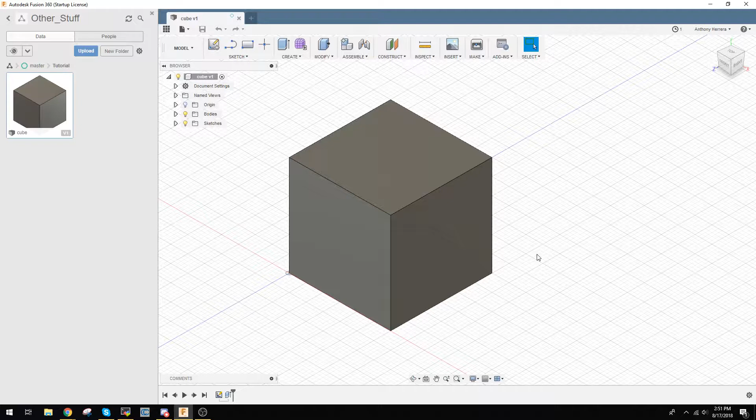I'm going to go over one of my biggest pet peeves when making a part, and that is this center point right here. I'll show you why I don't like it, and then I'll show you how I usually start out my sketches.

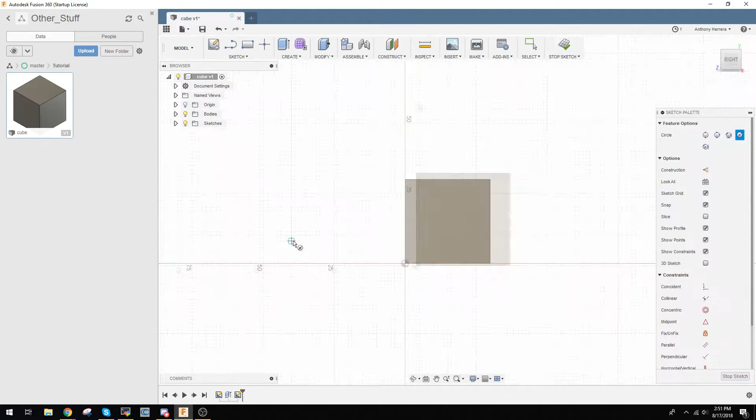Let's say I want to draw a circle on this face right here. Don't worry about how right now, just get the general idea. I want to put it right in the middle. Okay, I have the circle now, but where do I reference it from?

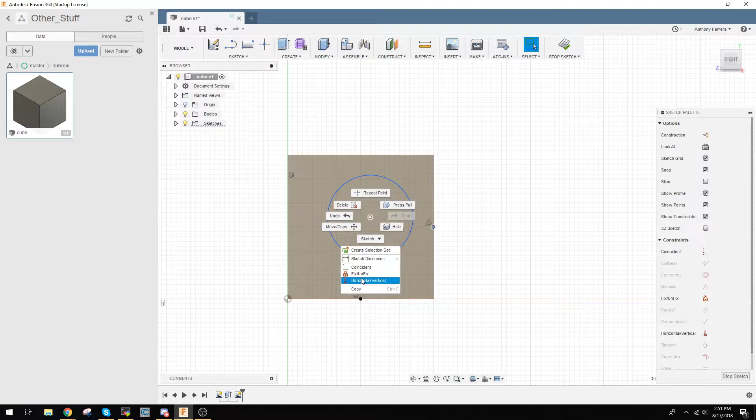I want to reference it from this point. So in order to reference it and put it right in the middle, I have to make two midpoint dots, select these two, make it horizontal, make it vertical, and then finally, after I dimension it, I can create and make a hole.

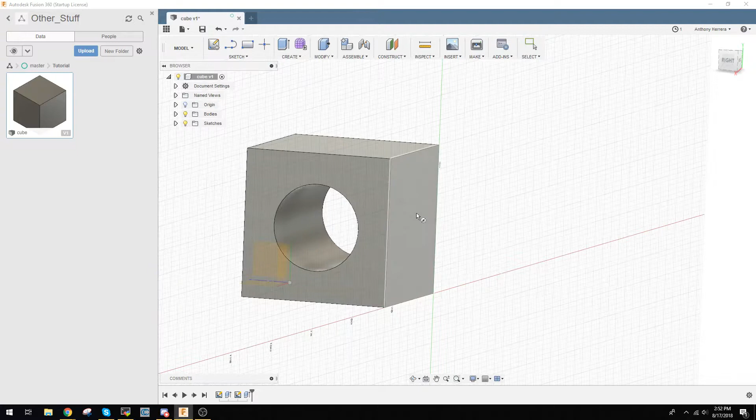Okay, well that wasn't too hard, but let's say I want to do the same thing on the other side, this face right here. Circle, go over here. Oh, well I want to make it in the middle. So now I've got to make a point, and I've got to go through the whole process again.

Alright, there, that's what we call the problem definition or something in engineering. I didn't pay attention. Okay.

So now that you see what the problem is, there's a way to fix this that I like quite a bit, and that is to go back to the original sketch and change where your base point is right here.

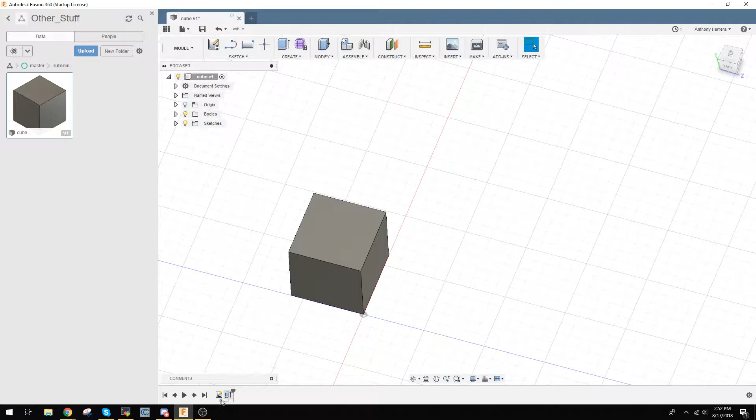So if we go back to the original sketch here, this is our 30 by 30 cube. That's great, but we're going to redo it. We'll redo it from the ground up.

So to select objects, what would that be? Left click and drag. When selecting, the direction that you drag makes a difference. If you go this way, only objects that are totally enclosed will be selected. If you go the other way, any object that the box touches will be selected.

So this way, it only selects the dot. This way, it selects both sides of the rectangle. Either way, select everything, delete everything, and we're going to start again with a new square.

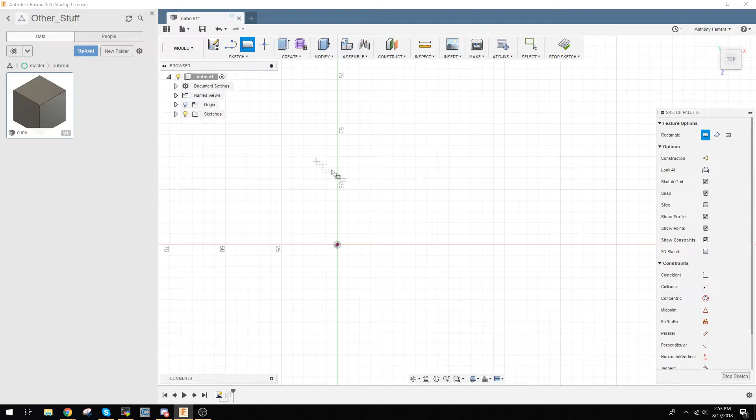If you'll notice down here, I didn't delete the extrude. That's okay, I can redo that afterwards, and I might be able to show you how to fix warning problems. So you come in here like we did last time.

You make a corner here, you make a corner here. Click, click. And we have to define it. So right now, we're moving around all over the place. So we'll define 30 by 30, just like we had before.

So escape from that, that was the D button, dimensioning to do that. Now, you see we're still blue here. Well, why is that? Well, because it doesn't know where to put it, it doesn't know where it is relative to everything else.

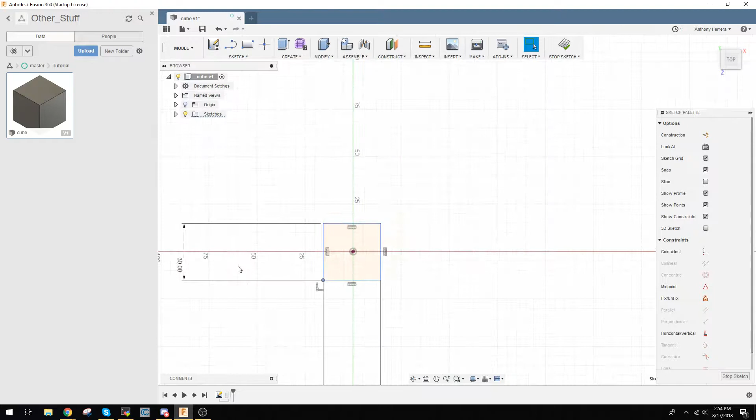So let's bring all this in a little. I use the mouse wheel to scroll in and out, I don't know if I mentioned that. It's kind of important. And we'll get rid of that, so it's just a big old square here.

So we put it roughly in the middle. Now, I have this point up here because I use it quite a bit. You probably don't. So go to Sketch, and then we'll bring it down to Point.

So we want to put the point on the midpoint of this line. So when you see that triangle, that means midpoint. I don't know why, it just does.

Alright, so I happen to be very close with that actually. But yeah, you can see those points are black, which means they're fixed, and they're fixed at the midpoint.

So now we get into a little more complicated stuff, defining relationships. This isn't too difficult, and this actually leads in pretty well to later topics.

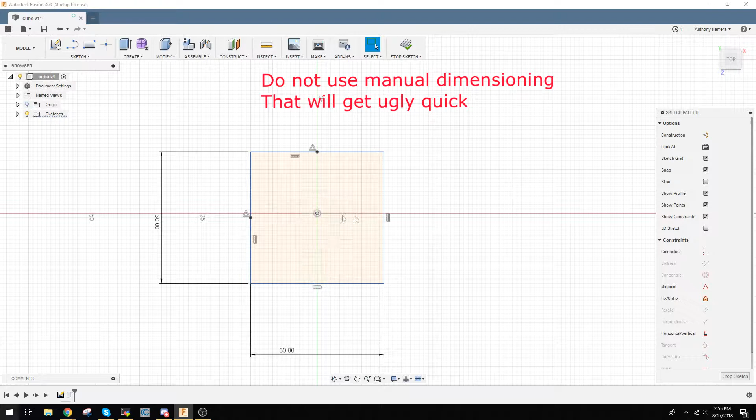But if I click this point, and then control click this other point—let's try that again, oh I pressed the Windows button. Control, click, control, click. Now if I right click, I can make those coincident, so right on top of each other, which we don't want.

I can make them fixed or unfixed. I try to avoid that like the plague, because fixing things is kind of a crude way to do stuff.

It just makes them exact relative to each other. They keep the same position relative to each other, and that can lead to problems later.

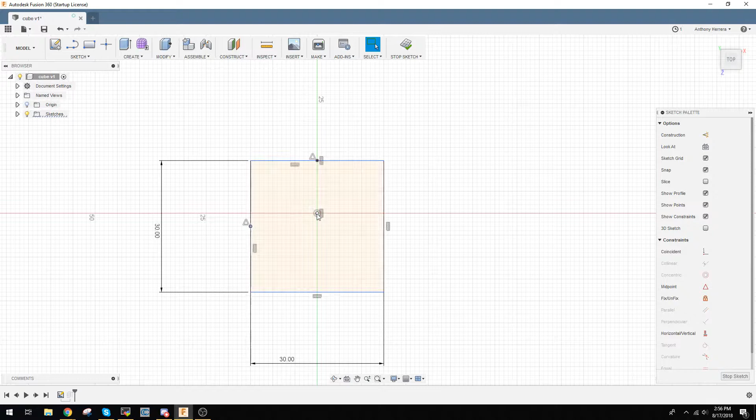So control click, click horizontal vertical, and it'll make it either horizontal or vertical based on where it's at. So you want to make it roughly horizontal and vertical before you align it. But if it's down here, it should work just fine. So same thing, control click, horizontal vertical. Now that center point is right in the middle there.

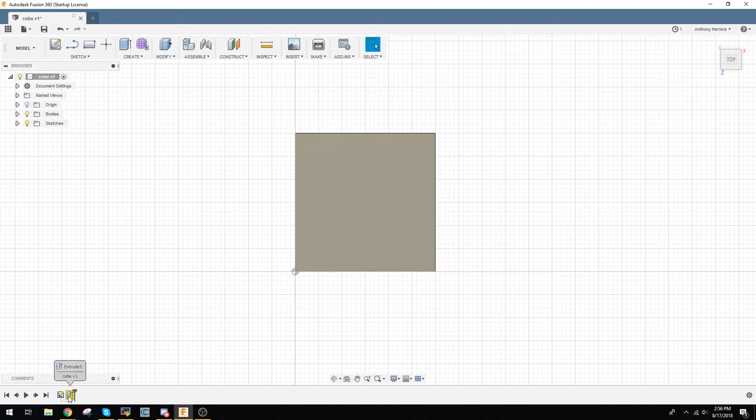So, okay, well it didn't update. Why not? It didn't update because we have to redefine what the extrude is. So if you roll it back, you can see it's yellow. Generally how I fix this the quickest way: double click on it, and then you look over here, oh, we're missing a profile. Well, okay, so we tell it to use this profile. And there you go, fixed it. If that doesn't work for you, you can delete it and make a new one up here, but redefining it's just fine as far as I'm concerned.

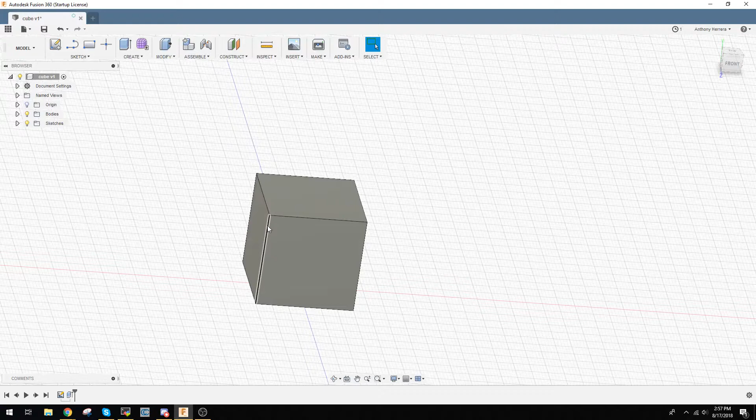So you might be thinking, all right, that's great, we spent all that time, but why? Well, let's try making that same circle again, and we put it right here. Look at that, we can right click and make that vertical.

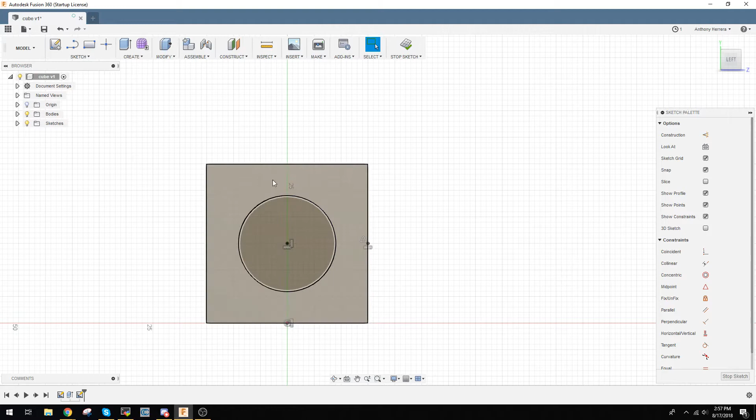So now it's vertical no matter what. That's why I like to do it. It provides a good frame of reference. And then you can add a point here and make it like that, just like we did with the other one. But I just like it because then you're not adding points everywhere and cluttering up your sketches a little bit.

I haven't done CNC machining. Perhaps having the center on the corner of a shape is better for that, but I don't know. I don't like it. All right.

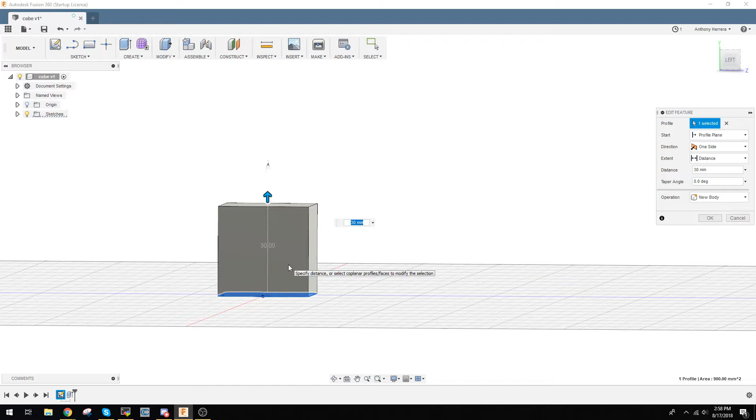One last thing: we can make that point in the absolute middle if you want. This I don't usually worry too much about because how many times are you making an exact cube? But it's probably not a bad practice to have.

So the way you do that is you go back to just your cube. I deleted the extra sketch I made, and I double click the extrude button to edit it again to change it.

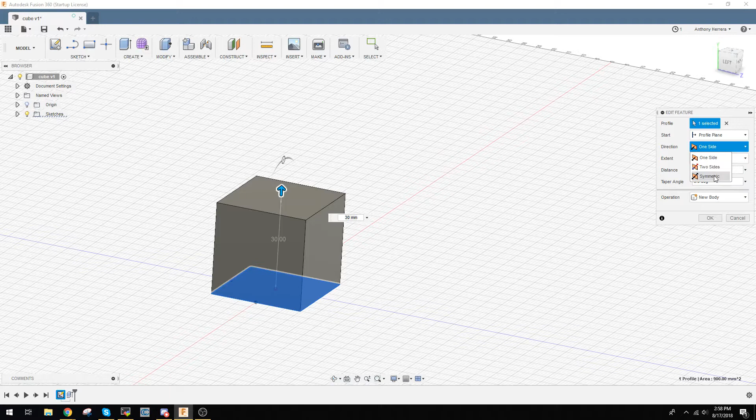And then on the direction, I do symmetric. So you have symmetric and you have two sides. Two sides just means that one might not be symmetric, whereas symmetric means they're the same. So to make a 30 millimeter cube, if it's the same on both sides, you need to divide by 2, make it 15.

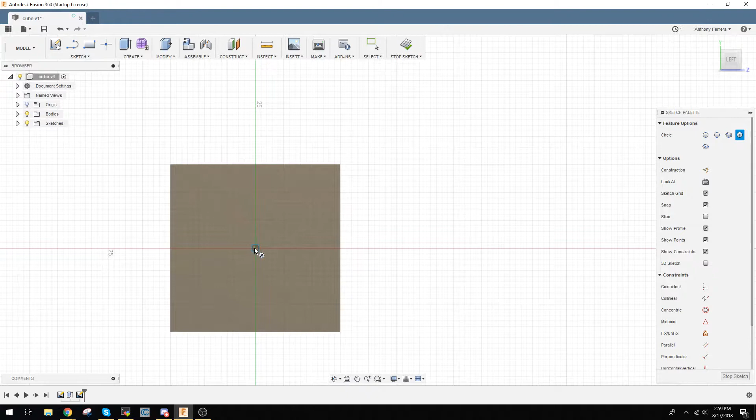Now, if we go to place that same circle on here, there we go, look at that. We can put it right on the projection of the center point. So all we need is one dimension to define that circle.

I like that quite a bit. Look how clean that is, look how clean that sketch is. It's beautiful. I didn't have to project, I didn't have to put any extra dots on there.

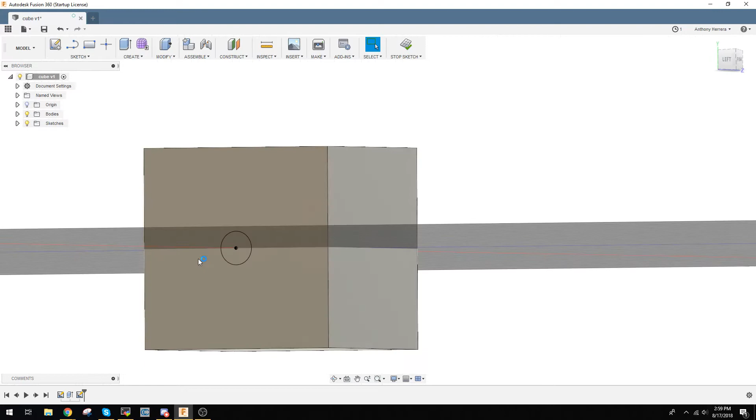It's perfect. Okay, well that's about all I had to cover in that video. In the next video, we'll be looking at probably how to revolve, make like a sphere, and go over some more basic shapes and some basic functions that you can do.

Okay, and then the last thing we have is, I didn't mention this, is how to save it. So you get this version description thing going on here. You can just have it user saved. If you do that, it's just going to appear, there's not going to be a description associated with it. But if I put, let's say, oh God.

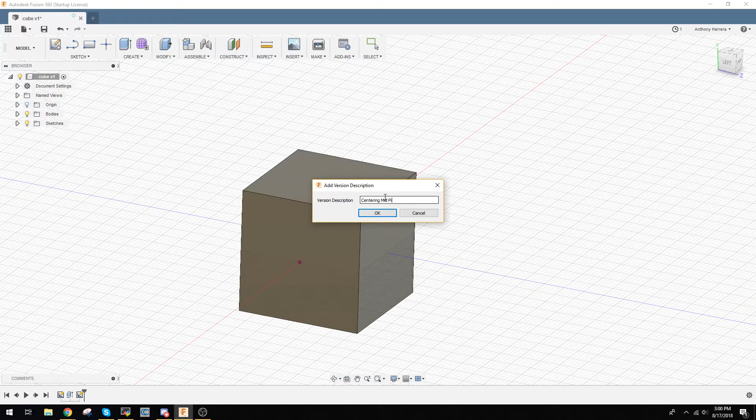Centering midpoint. Now what that does is if you go to show data panel, saving right now, there we go. So there's two versions: there's the first version, then there's this version. So if I click on the version, you can see what the description of it is right here.

That way if you get real far into designing a part, let's say you've worked on it for a month and you realize, hey, I want to go back to what it was last week, you can just go to the version and say, oh hey, go back here. Right now it doesn't matter very much, but it's just a good thing to keep in mind.